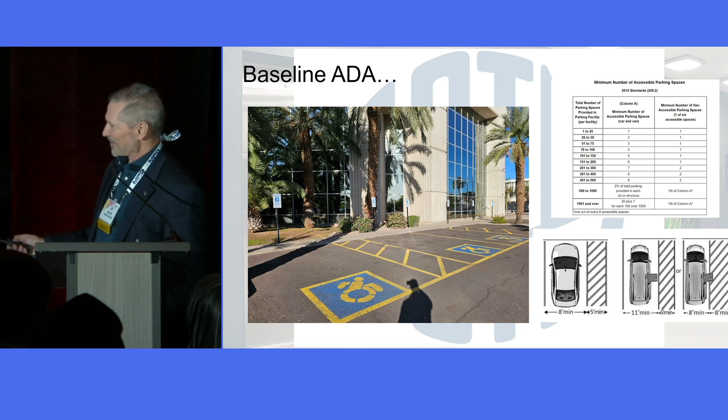Like I said, the sign's got to be 60 inches to the bottom, okay? Look at that—does that look like 60 inches? This one here, a little less. While I'm thinking of that, don't use your tape measure in your pictures. I do it so I have stuff for presentation, okay?

When you start doing that, you're getting into that territory where you're doing a full ADA, and it's an entirely different animal—very, very granular, okay? So don't do that. I even have a little pitch gauge thing that I put on ramps to see how steep they are, but don't put those things in the pictures. So when you see that, it's just me. But anyway, you look at those, and those are just a little bit short, right?

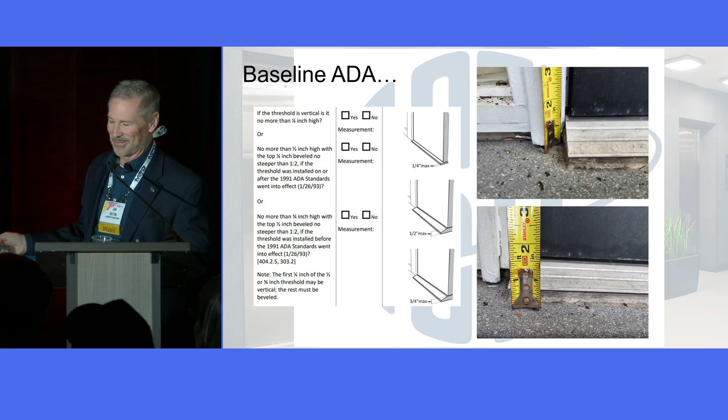Of course, you have to think. If you're in a chair and you're trying to navigate through something and there's an obstruction, like a threshold, well, there's very specific heights. Okay? Again, don't use your tape measure. But this one was really funny because this was an attorney's office. And that's their front door, right? Oh, this is good. This is good.

Another very, very common one. If it's got a service counter, it can't be more than 36 inches. And that's very, very common. No one's going to do anything about it. I don't care, but it's one of those things that should be in your report. This is another very, very common one. There's very specific requirements for that sign, the location and all that kind of stuff.

Hardware, though, is a big one. Okay, now, like if I find this sign and it's on the door, is it right? No. Is it substantially right? Yeah. So pick and choose your battles. But the hardware you can't compromise. You have to be able to operate it with like a closed fist is basically the rule. No grab and twist type of things.

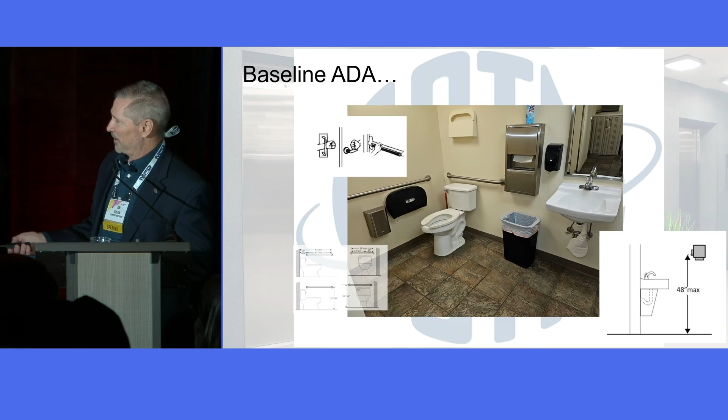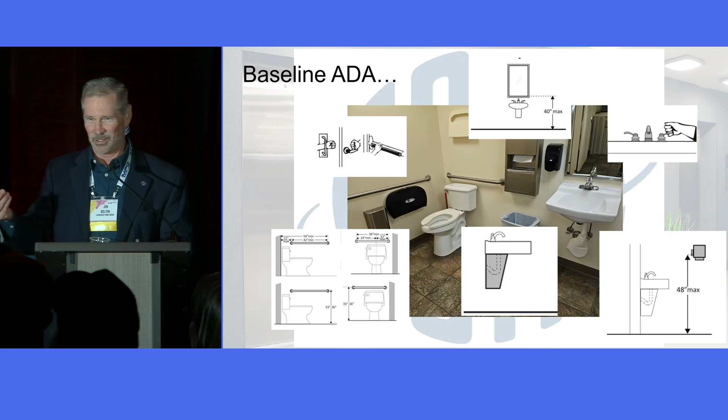The bathrooms have a ton of different things, but again, they're not hard. There's requirements again for the hardware. The grab bars have got to be one behind, one beside. There's certain locations, they have to be certain heights. The plumbing all has to be protected, right? That's why you see that all the time, because it has to be. Again, the hardware on the faucet, the height of the towel dispensers, 48. These things will start sticking in your head when you start doing them. But there's a lot of different things. And get that book I showed you. It's a free download for ADA stuff.

All right, is that cool stuff? It's not hard, right? Hopefully you're sitting here, you're feeling emboldened, right? Make me feel good. Shake your head.

All right. Elevators. Don't have a ton of them, and they're not hard. You don't have to pawn these off on another contractor every time you run across them, because you're just doing baseline stuff. The very first thing you're going to need to do is get familiar with the types of elevators. The good thing is these are what you're probably going to find 99% of the time, hydraulic and traction. And these can be grossly expensive to modernize. I'm getting excited. I'll get to modernization here in a second. Never mind. Familiarize yourself with what kind they are.

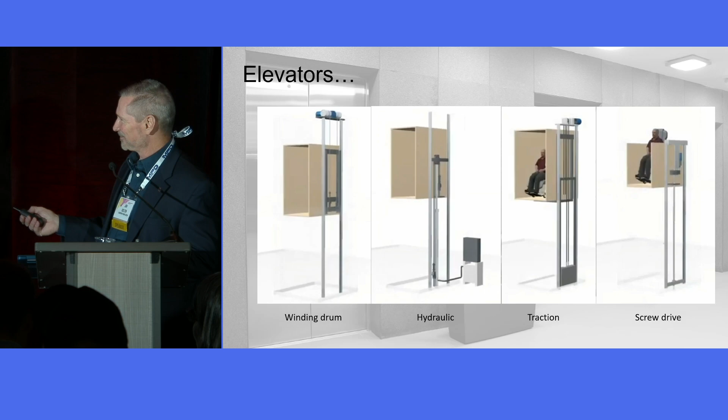The interior components, what kind of shape are those in? Especially flooring. We'll show you in a second. If you get lucky enough where you can see the machinery, like you can get above a car or below a car in a pit or something like that, you're looking for basic stuff. Does something look worn out? That's it, baseline. You're not going to measure the depth of the cog on the gears. It's not that difficult. So we get a visual, then a functional.

You're going to ride it. That's pretty tough, right? Congratulations, you're all qualified. You're going to do that, but you're going to start to notice where the controls are. Okay. Another big one is leveling. The car has to be on the same level as the hoistway, the floor that you step out on. Right? Otherwise, it's what? It's a trip hazard, and it makes it hard for a chair to get in and out, right? So you'll start noticing those.

And when you start seeing those, well, now all of a sudden, it's a defect that you're going to call out, and if there's enough of them, you call for modernizations. The auto-open feature, when you do this, and the door opens, because you have to have those, that's why. And anything unusual is not right, okay? If it jerks, if it's making noise, those are all signs that there's something wrong. And guess what? We don't even have to know. All you got to do is say, hey, your stuff sucks. The job is really that easy.

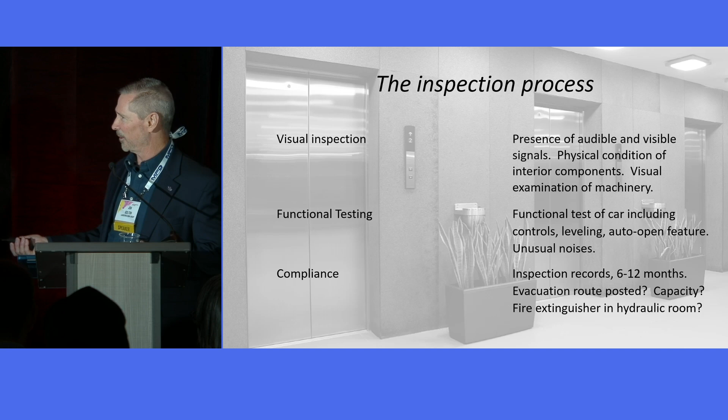Then the compliance things. You're going to be looking for inspection records. You're looking for the certificate, the capacity. 2,500 pounds, 3,500 pounds, whatever it is. Well, it's all written right there for you. They actually carve it into the elevator for you. It's really simple. Things like a fire extinguisher in a hydraulic room. You'll be looking for those. They come in a lot of different sizes.

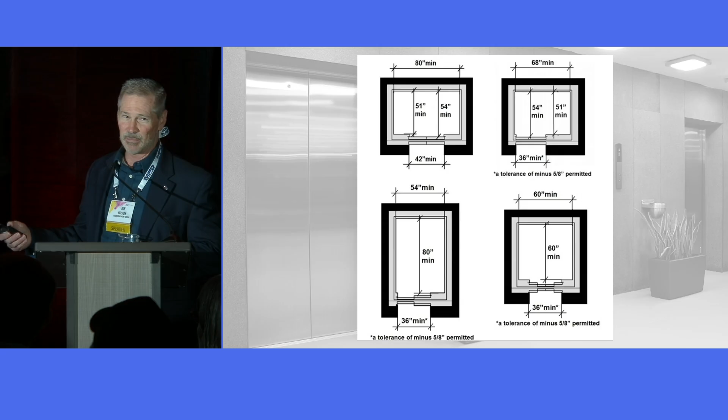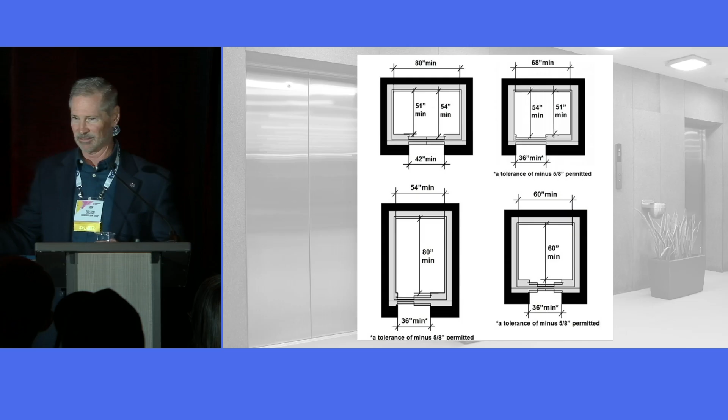Okay, you don't have to memorize any of this stuff, but if you see there's one thing common in all of those, 36 inches access. You didn't have to memorize another number because we already know that you have to have 36 inches of access everywhere. All the way through, from the parking spot to the front door to the bathroom to the doctor's office that they got to go into. Everything, right? 36 inches wide. So that's easy.

When there's an alteration to one car, every other car that goes to that level has to have the same alteration. Ooh, they got like 7 of them here. That gets expensive real fast. Really, really, really fast. But it's all about a consistent level of accessibility. Okay, so you can't have one that's modern and works and the other one that jerks and isn't level and all kinds of stuff. You have to do all of them at the same time.

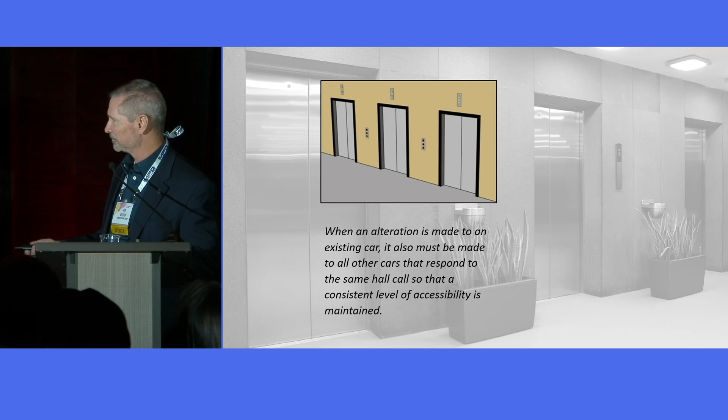Now, of course, standards apply to things that already exist. We're inspecting buildings that are already there, right? And there is a whole compliance scope for that, and I will show you where that comes from here in a second. But what's that? Correct. Good question. So he says, hey, there's passenger cars and there's freight cars. Freight cars, well, you ruined my surprise. It's coming up. Freight cars are not part of the accessibility stuff.

Those are exempted, okay? Can you imagine going to a construction site? You know, they have the elevators for the workers and try to make that wheelchair accessible? So there's certain things that are not included, and freight cars are specifically meant to be just for staff and freight and that kind of stuff. Those do not contribute to the accessibility thing. But the standard is ASME A17.1.

Good luck finding free information online. There's very, very little. This is another standard that you have to purchase, okay, that you have to buy. Good thing is there's enough information out there that you can get by. But that's where all the rules come from, okay? And of course, it's full of ADA stuff. Not just the modernization and leveling, all that kind of stuff. There's a whole bunch of ADA.

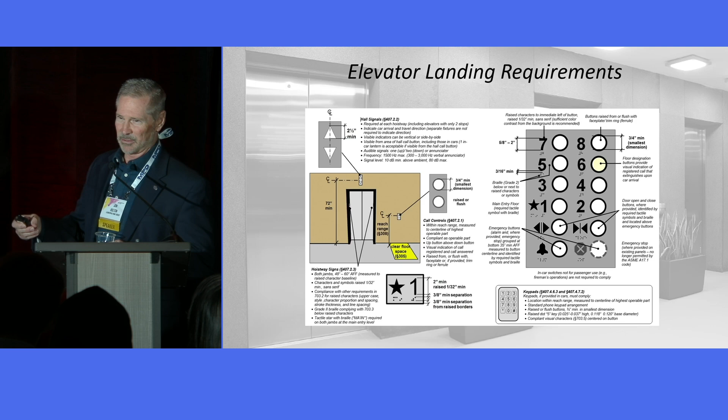Okay, just recognize that you're supposed to have these things. And when you look through that ADA book I was showing you, that free thing, it explains all of those things.

You're always one step ahead of me. Keep ruining my surprises up here.

You want to see something interesting? Every single elevator always has a star next to the one. No, that's what everybody thinks. It's actually because Dallas Cowboys are the #1 team in the country. Hey, what? Look at that. Boy, that was right in the gut, right? You're welcome, damn it. That's the star rating. There you go. Yeah.

Man, this is actually a really good question. There is so much information. If you go to Google and you start entering in elevator accidents, there's a ton of them. I'm not a doomsday prepper or anything like that, and I've never been into the gore type of stuff, but there's some stories.

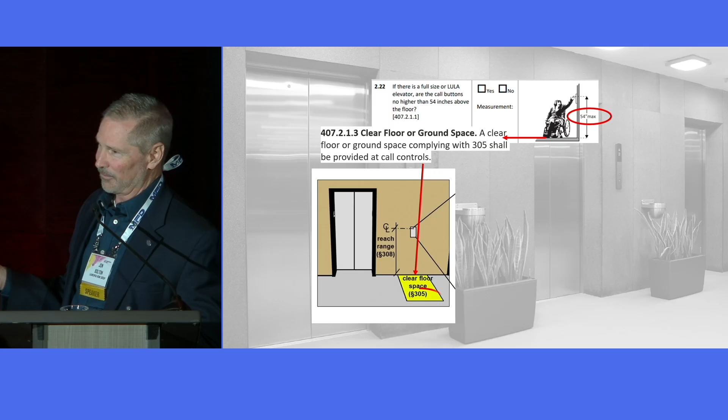But again, everything has a height requirement, because if somebody's in a chair, you can't put something that only Hank can reach, right? You know, love a short guy. So there's height requirements there, but you also have to have a clear space in front of those controls, okay? What is the definition of a clear space? Well, it's right there, 48 by 30.

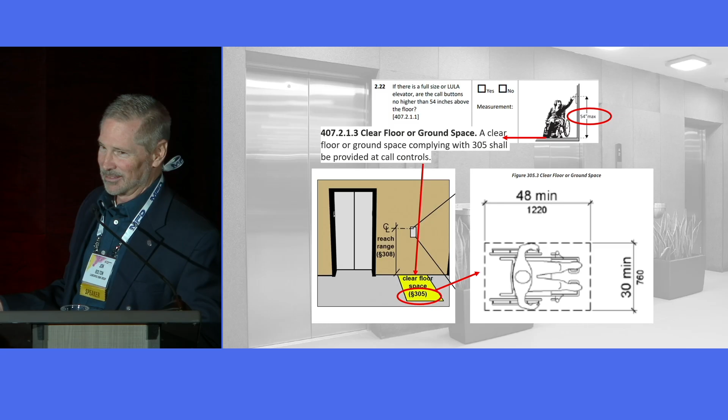Why? Well, because people put plants, cigarette butt trash cans and whatever else in front of the controls, and if you can't get to it, if you don't have the clear space requirement, 48 by 30, then that's a defect. Now, sometimes it's as easy as moving a trash can, no big deal, right? Yeah, it is kind of common. You find stuff, because I get it, it makes sense. They always put trash cans there so you don't take the trash on the elevator, right?

Okay, visible and audible signs. You should have all those signals. Again, it's very rare not to have all that stuff.

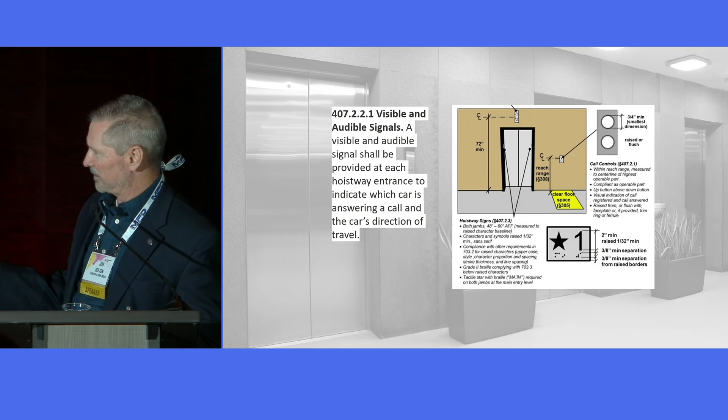You will display the Cowboys are number one on the first floor of every elevator.

Here's another one out of that book that you can get for free. Okay, there's actually a lot of them in there. It's in a survey style presentation. So you can go, is there a sign, right? You can just go right down the list and check them off. Maybe make your form look just like this. Hey, it's not a bad idea. So it's really, really easy.

Hey, you've done this your whole life, right? Now there's, because it's in the Big Book of Rules, it says thou shalt have auto open, okay? There are some critical areas which they define as 5-inch and 29-inch, but honestly, they're more of a curtain style detector where it runs from very low to very high, right? So when you get guys like Hank, it'll still pick it up.

And you know how you jump on the elevator and you're frantically pushing that close door, and it won't go? Well, there's a reason, because it has to stay open for so long. It's all in the Big Book of Rules. So punching that thing like a madman or madwoman ain't going to do you any good.

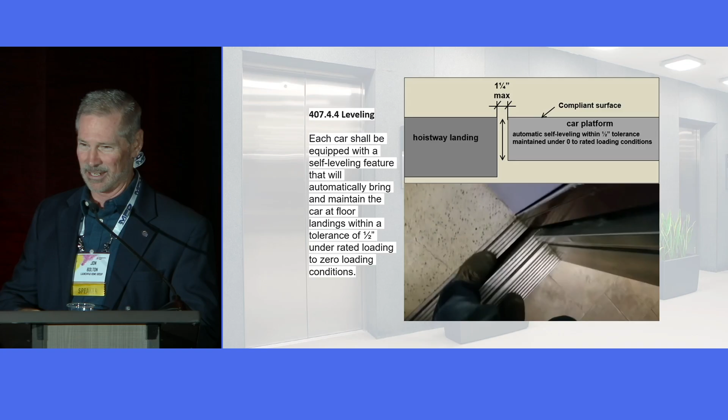Sometimes, that one, the hotel I did in Sarasota, my God, it was several inches, big time. Good thing is I had a list of very good reasons on why I'm recommending modernization, and I will get to that in a sec, because you're going to be blown away. This one, I show up, and this is what is there. It says, hey, caution, dummy. You might trip and fall. Thank you. See how easy this is? Sometimes they leave you notes. Yeah, darn right, liability. That was super easy. I got pictures of that coming up too. Yeah, it's all about money.

If you have carpet in there, a lot of times it's tile, but if you have carpet, it's got to be glued and screwed. It can't be loose or there's a trip hazard or anything like that. It's got to be firm, stable, non-slip, all those kind of things. But this is just common sense, right? You've been going up and down stairs for decades. And when the riser heights are excessive, you feel it. Same thing with elevators. You're going to get on and go, something's weird. You're onto something. Follow your hunch, right?

Same thing with the pile height of the carpet, okay? You have limits on that because you don't want, dear God, we want to bring back shag of the 70s, right? Something like that might not be compliant.

If you've got tile, again, you're going to have a point where it's too high. Think like you're in a wheelchair, okay? But there's pictures. Remember, there's pictures in this book, so you don't even have to memorize anything. You just have to own it, and it's free, so nobody has an excuse.

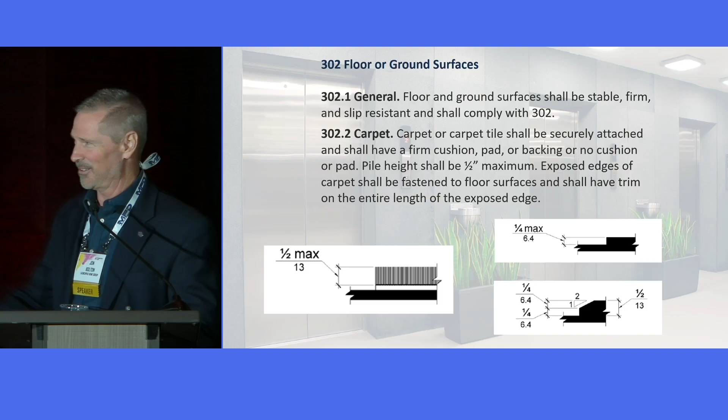If you can get in a mechanical room, absolutely request it and absolutely go in it, all right? They have to be well lit. There's got to be a fire extinguisher. There's usually a book in there, and you can flip open the book, and you can see that Joe signed off on this date. He had to replace this component, right? I'd take a picture. He replaced a major component, or if they're not too long, you kind of read through them all, and if you're seeing something that's consistently breaking, that would be a red flag. So you take a few minutes and read the records there.

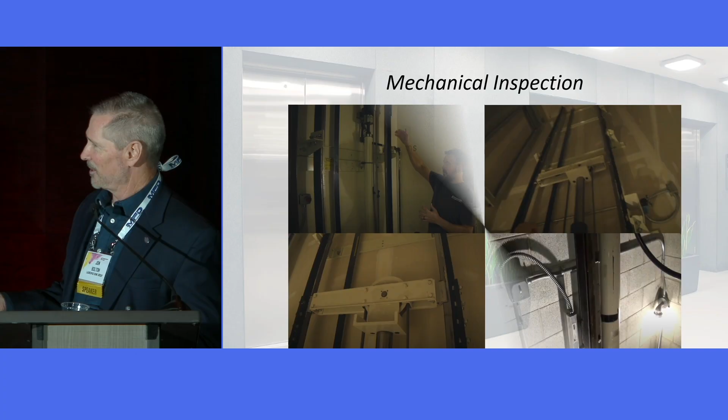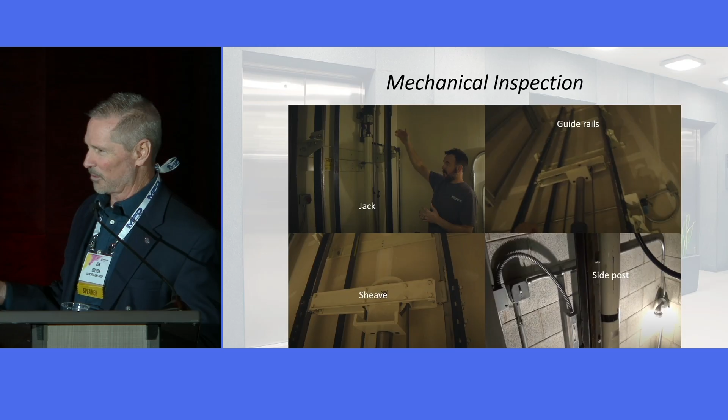Of course, if you find a hydraulic stain on the ground, that'd be a good one to document. If you're doing phase ones, right, Hank? That's something you got to look for. Hydraulic leaks. And anything visual, right? So if you get inside, you don't have to memorize the name of it, it's a sheave, it's a side post. It's just so you recognize and take pictures and look for the obvious things. We're not mechanics, okay?

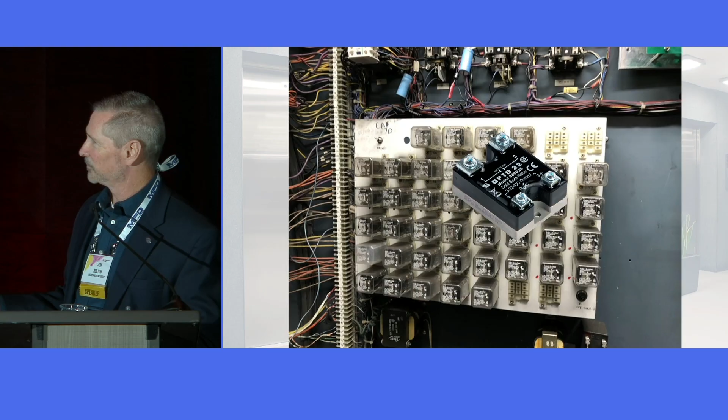This I've seen multiple times, and it's over your head. That's looking straight up, and it's a controller for the door. Helps the door open and close, and I just look for anything obvious. Put that in there. When you get in a control room and you start seeing capacitors, you know this sucker's old, all right? This is 80s vintage. Okay,

back when the last time the Cowboys won, yes, exactly.

This is just real simple. It's old technology, and this is probably time for a modernization. This is that same place where it had the sign on the door that said, "Hey, I'm broke. Thank you." And I look inside there and, matter of fact, there's a picture of it. I mean, yeah, this is just so old, it needs a modernization. It just makes the decisions easier, right? You can't require anything of anybody, right? But your report is going to reflect. They can't force you to replace if you can fix.

Yeah. So this is a hydraulic pump. There's a pump in there, and it pushes hydraulic fluid in there and makes the post go up and down. Makes the car go up and down, right? Real simple. So, well, there's a sign of a previous leak. Picture, canned statement, done. Piece of cake.

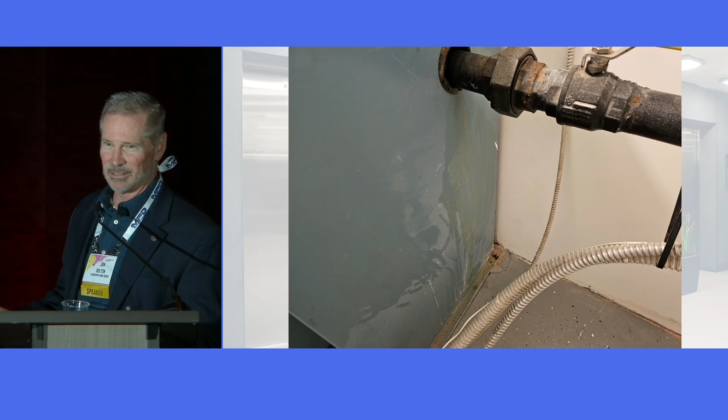Okay, modernization. I keep talking about that. This is the process of modernizing. Wow, who'd have thunk with a name like that? But it's not just the mechanical stuff, it's efficiency things, which is not just new light bulbs, okay? It may be a more modern, efficient, less energy consuming motor. Okay, there's a whole bunch of stuff that they can do. The time frame is 25 years where they recommend modernizations.

And I'm not gonna lie about this, but I'm gonna blow you away how much this stuff costs. There's always variables. If we've got 41 stories like that tower over there, that's gonna be a lot more expensive than a 5-story. Obviously, you get that stuff, right? But as an average, a hydraulic modernization could be $110,000 to $130,000 per car. If you have a traction style, that could be $220,000 to $250,000 per car. You see out here, they got 7 of them? Whoa. Okay, that gets expensive really, really fast. I'm not lying, those are real numbers. So that's a big thing. But all you got to do is check marks, right? We got a list. We got pictures.

All right, I want to hit some fire sprinkler stuff because, again, nobody goes to home inspector school and learns how to do elevators and ADA and fire stuff, right? And we'll hit some sprinkler head things. Why is this so important? Besides the obvious, fire safety. Any firefighters, by the way? There's always a firefighter.

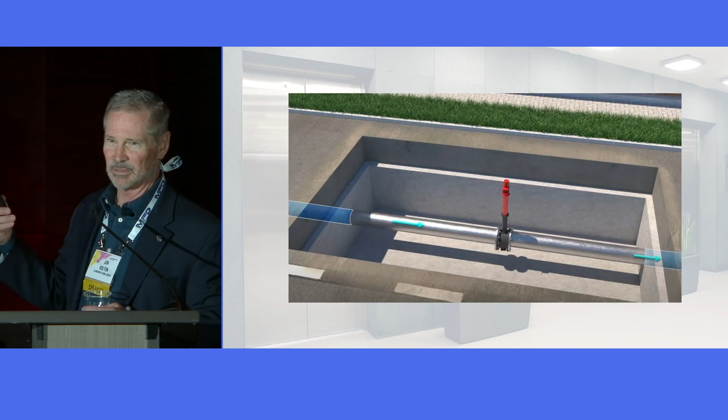Gotcha. So this is what it looks like. Once this is in your head, it'll stay there, right? It just goes down to the water line and then turns water on or off. So if you have to service something, you can shut it down, service the thing, and then open it back up. That's all it is.

The risers can be inside or outside. You'll find both. You're not going to operate anything on these, you don't touch them, right? But we can all take pictures. That's simple, 5th grade level here. Easy peasy.

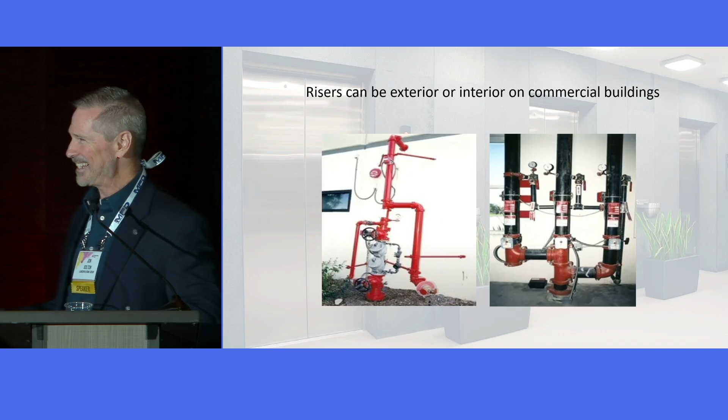You want to get the certification stuff, you want to get pictures of these things. Now, of these pictures, 2 of them are illegible.

Whoops, darn it, sorry, I don't know how to go backwards. Thank you, appreciate it. Thank you, Lord. God's got my back, baby.

A wet pipe system means the entire thing is full of water all the time, okay? So the riser comes up and the branches go out to the rooms and spaces that it's protecting. The water is always in there. That's a wet pipe system.

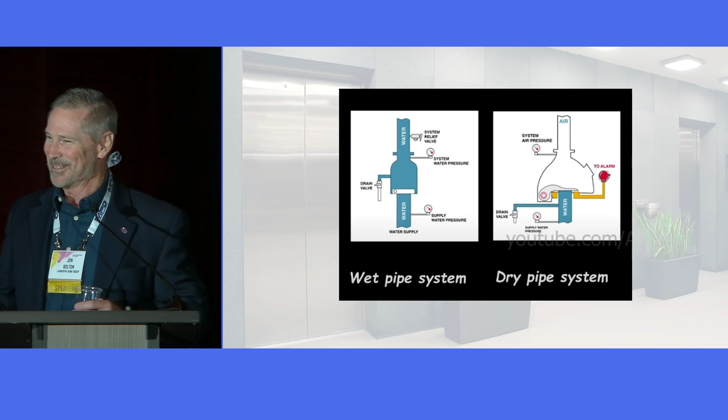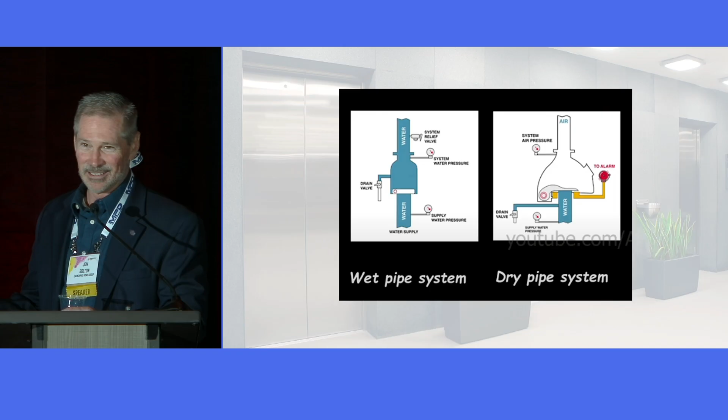And you wonder, okay, all you guys north of I-10, don't answer, but why in the world would you want a dry pipe system then? Freezing, yeah, there you go. You're obviously from north of I-10. If it's subject to freezing, that would be a bad thing. So hence, the dry pipe system has its uses. But now you know.

Probably. Makes sense.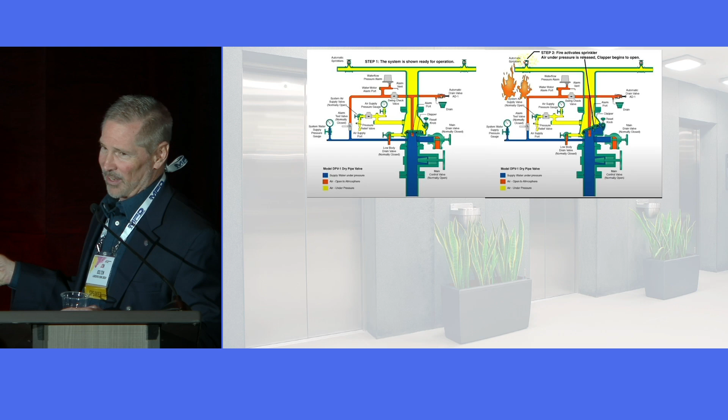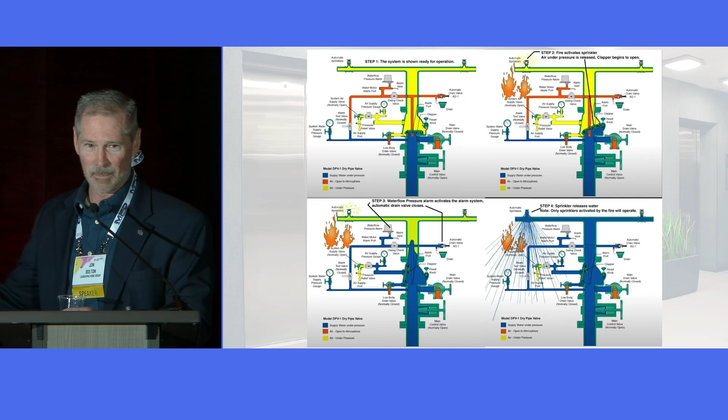This, they call it a clapper valve or something similar to that. So there's water up to it, right? And a fire breaks out, it activates the head. Now all of a sudden you're losing pressure in these pipes, and then another valve is going to open up the clapper valve and start letting water out, fills the system, and water is dispersed. So that is a very basic explanation of how a dry pipe system works. Pretty simple.

So the big question is, how do you tell the difference, right? I'm glad you asked.

Well, when it's a wet pipe system, I don't have that big valve right here, right? It's just one pipe because the whole thing is full of water. When I have this big, huge valve, this is the wet part and this is the dry part. I'm also going to have gauges on the dry part and the wet part, so it would be a good idea to get a picture of these gauges. If you can read, you're in luck, because a lot of them just say it. This is dry pipe.

Dang, and in our system, when I review, sometimes I find it's wrong. So it's a good thing that we had a reviewer, right? If you're a solo operator, you're going to have to slow down, okay? And look, this one right here says wet system, that's cool, you can read it right on there.

All right, there'll be a differential pressure because there's air holding back the water, right? And it's usually about a 3-to-1 ratio. I've heard they go up to 5-to-1, but say that one's 40-ish and the bottom's 120-ish something, so that's about a 3-to-1, right? That's going to help me identify, well, this is definitely a dry pipe system. So not real hard to identify, right?

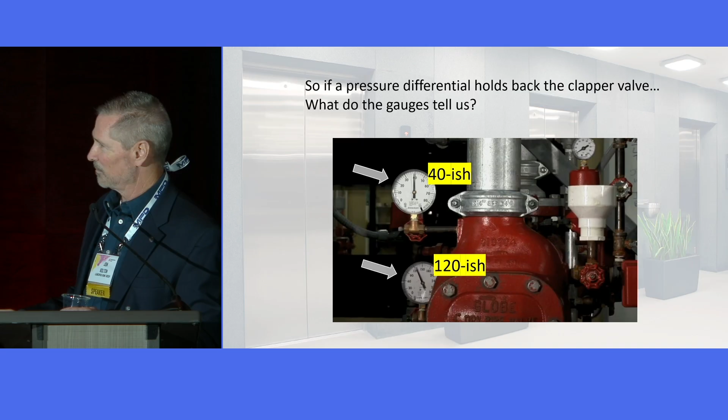This is a static system, the same exact thing that's bringing water to your house. The pipe comes up, and all of your pipes are full of water. You open up the kitchen sink, water comes out, right? Same exact thing, so it's a static pressure. So there won't be that differential pressure. See how simple? Love it.

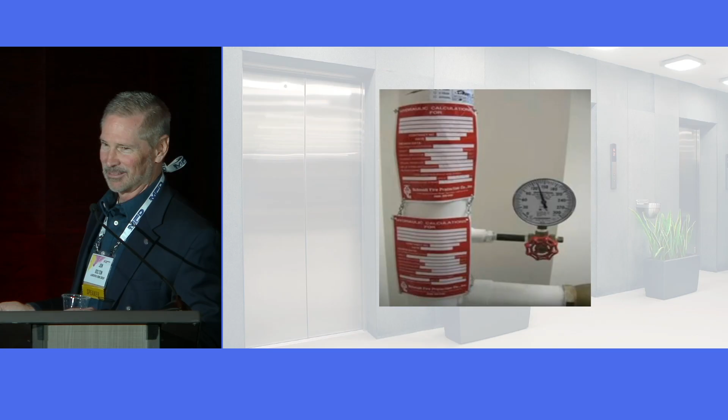So I got one gauge, wet pipe system, right? I haven't lost anybody, have I? I don't think I can see anybody. But okay, if something said 0, that would be a big red flag, right?

And you're the fire guy? Okay, don't laugh out loud, but feel free to correct me if I'm going wrong, if I'm saying anything wrong. Am I all right so far? So far, all right, cool.

Well, there's your FDC, Fire Department Connection, right? And those couple guys are going to jump off the truck and hook up, and now you have more water, higher pressure, more efficient system, right? So it's just a big pipe serving a bunch of little pipes, just like a house. If you break it down and think about it like that, 5th grade level, it really makes it simple.

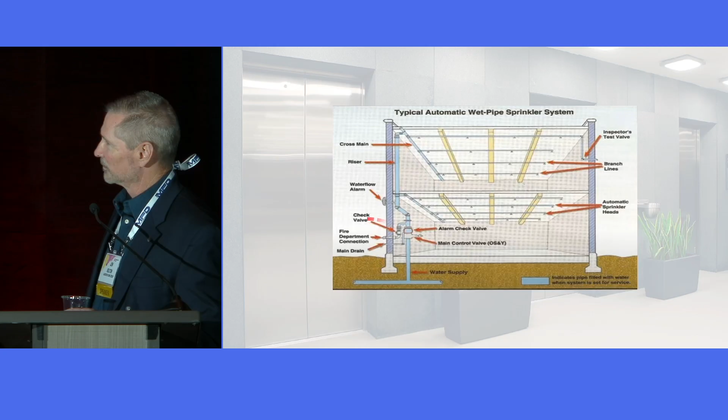Yep, FDC. Okay, bam. That was my whole point in that. So, simple picture.

There are other basic types, and I just want to mention this so you're aware. Like the example I gave before, if you're converting a daycare to a storage facility where you're storing foam, products, chemicals stacked all the way to the ceiling, these are going to be drastically different engineered systems. The biggest thing with specialized storage versus normal commercial space is how much water is moving through that little device, those sprinkler heads. You might see this imprinted on the heads, letting you know it's a very specific engineered type of head for that application. The deflector pattern may be different, making the water droplet bigger. There's real engineering that goes into this, but we don't have to know any of that, just so you're aware.

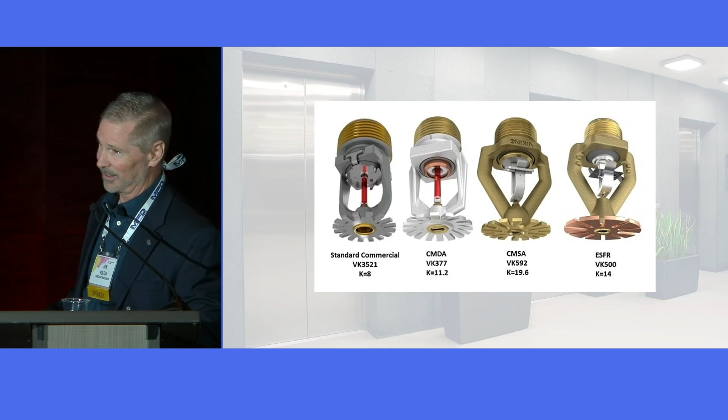Makes sense, all right? Like I said, the biggest thing, fancy words here, is the K factor. That's how much water - bigger hole, more water. Bigger orifice, bigger K factor. Those are some of the biggest things: how much water they're delivering, how fast it's deploying the water, for very specific applications. And that's all I got, because they look the same. It's not like you look up and say, oh, that sprinkler head is something special.

They look the same, so you don't know by looks. If you have heads that are subject to damage, you'll probably see some type of cage, something that protects it.

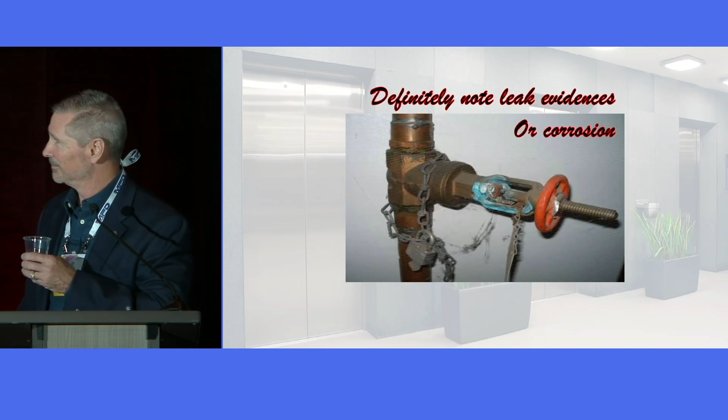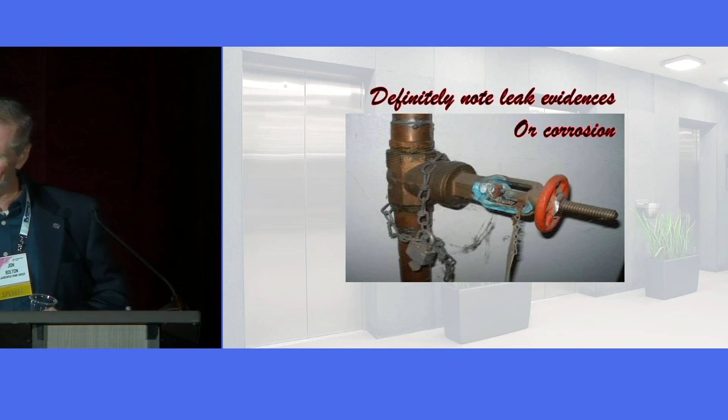All right, so pictures - that's always the best. Inspector porn, right? What do you see? Well, I gave you the answer, if you can't read I'll help. Something's leaked, that would be a bad thing. That's an easy identification picture in your report. That wasn't hard. Here you are criticizing a fire system - we aren't even firemen. We need a badge or something.

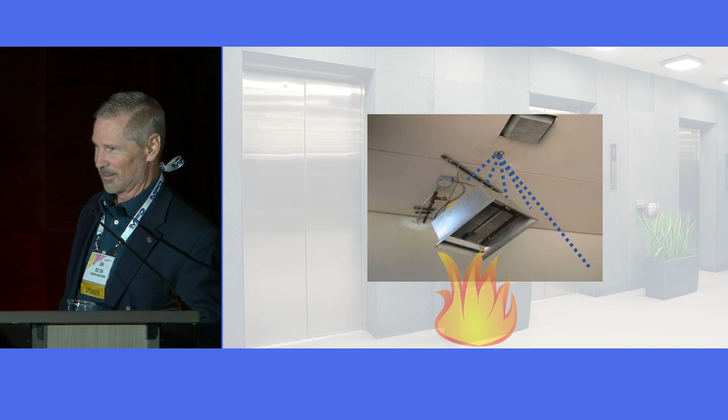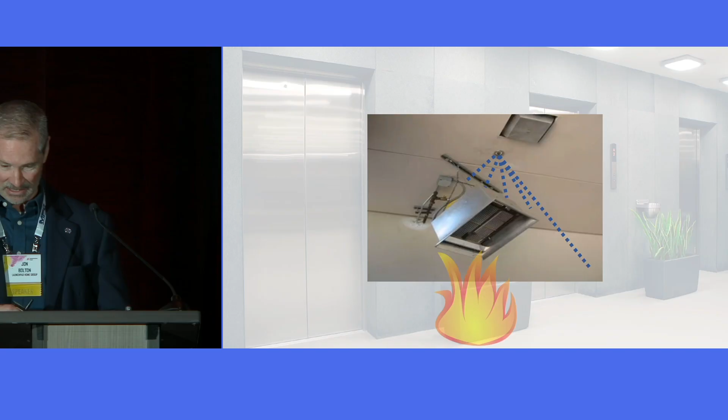So this is how you think - I always use the macro-micro approach. I walk into the room and stand there first, just get the overall picture. And I see something like that. That was easy: picture, defect, recommend repair. Simple, right?

Because you see this all the time. Yes, that's a very simple fix, I get it. But now you recognize the problem. So if a fire broke out down here somewhere, that may not be any good, or it's going to take a lot longer for the water to get down there to the fire.

There is, and I would not attempt to cite that on every single application because it may vary. Now, the only thing I know is consistent is it's got to be 4 inches off the wall, minimum, can't be closer than that. But I'm sure there's a lot more - no more than 6 feet. Okay, yeah, all that stuff will be engineered, laid out.

Well, that's a good point - what happens in commercial buildings? The interiors are modified all the time. And now all of a sudden you walk into an office and this poor sap's only got one receptacle. He's got 2 returns, no supplies, and 1 receptacle. You see that kind of stuff all the time. So yeah, very, very good point there.

Uh-oh, that's the end of my presentation. If the obstacle is permanent, well, you just go around it. Not that hard, okay?

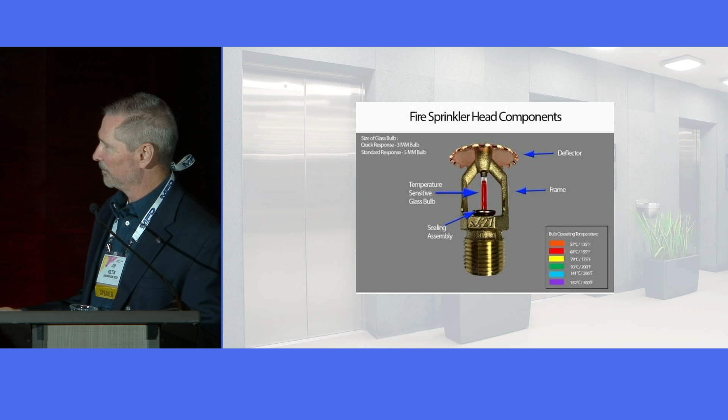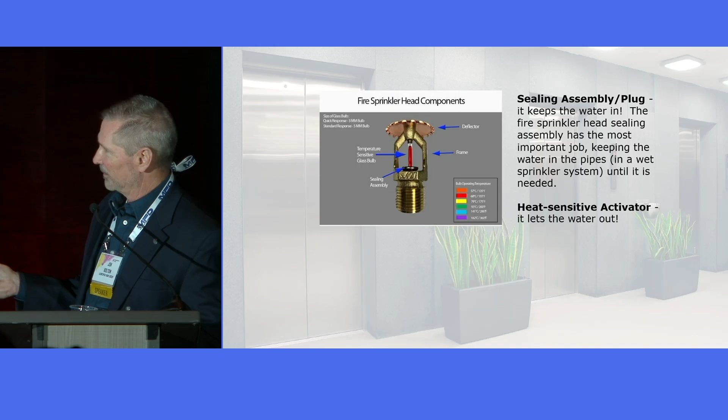So the primary components that we have here, the seal is what keeps the water in, right? The activator, heat-sensitive activator there is what lets the water out. The deflector will be designed for whatever application it's designed for, how to disperse the water, how wide, how big the droplets are, all that kind of stuff. And we don't have to know any of that, just so you have the concept, right?

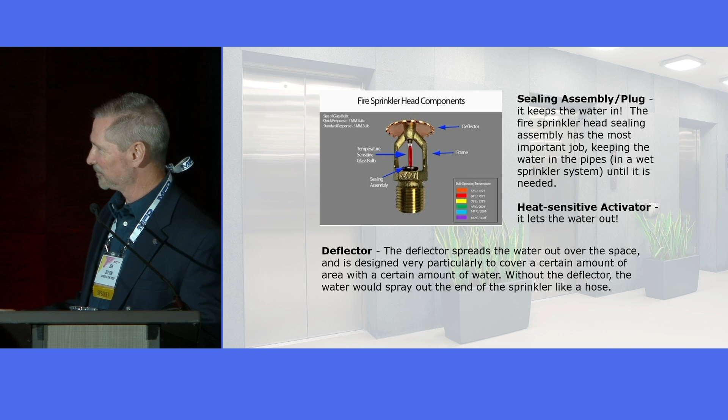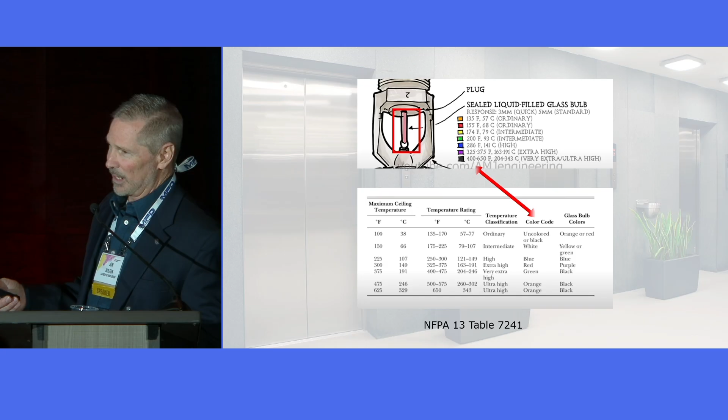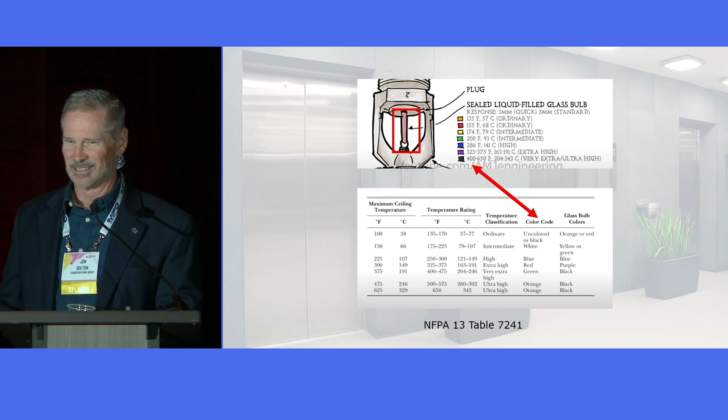Almost all the ones you see are red, but occasionally you'll come in and you'll see different colors, and they break at different temperatures for different applications. But again, that's all engineered stuff. I would probably look for consistency, though, right? I got a black one here and a red one next to it, and then a blue one. Well, something's not right. Follow your hunch. And the good thing is you don't have too many handymen working on fire sprinkler systems. Those just screw them up.

But now you know. Now, if it does have that little bulb that breaks, they're usually full of a glycerin that's very, very sensitive to temperature, so that's how they can control it. But there's also linkage type sprinkler heads. Okay, not that there's anything wrong with them. They're just different. And the same thing, they're heat sensitive and they break at different things.

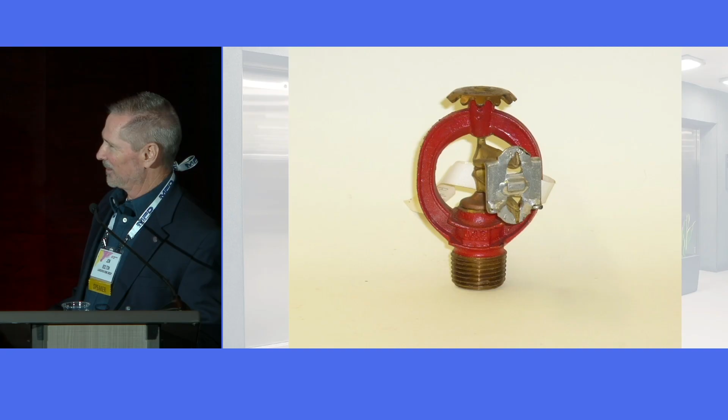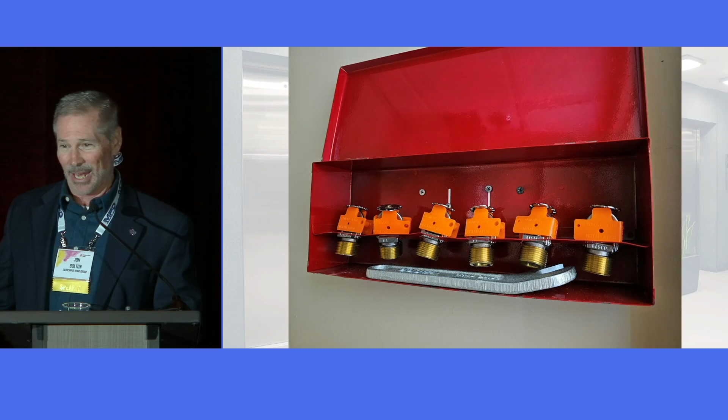There's all kinds of different looking ones, so don't be alarmed, pun intended, when you see a linkage type thing. Okay, extra heads, you have to have them. It's in the big book of rules. Okay, it says thou shalt have extra heads. That's what it says right there, right? Now, this is the easiest place to identify the manufacturer, and that's very, very important to identify the manufacturer. I'll show you why in a second. But here, I can just pick it up, put it in my hand, and take a picture.

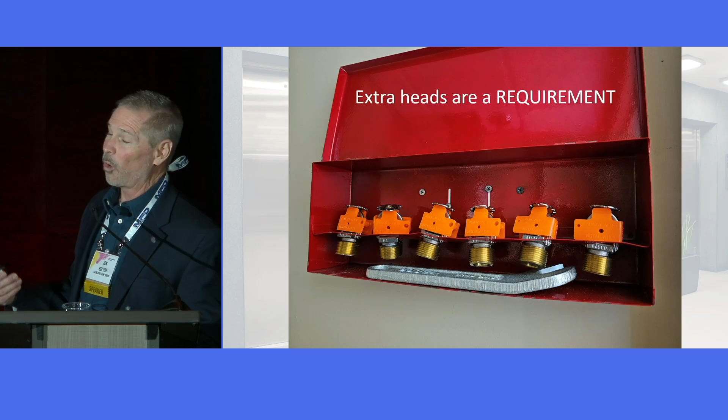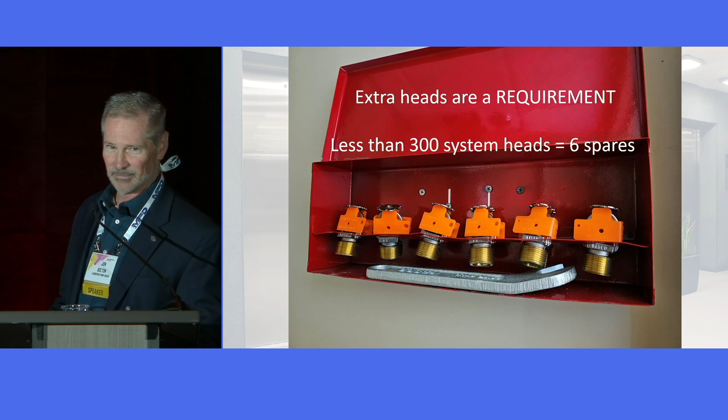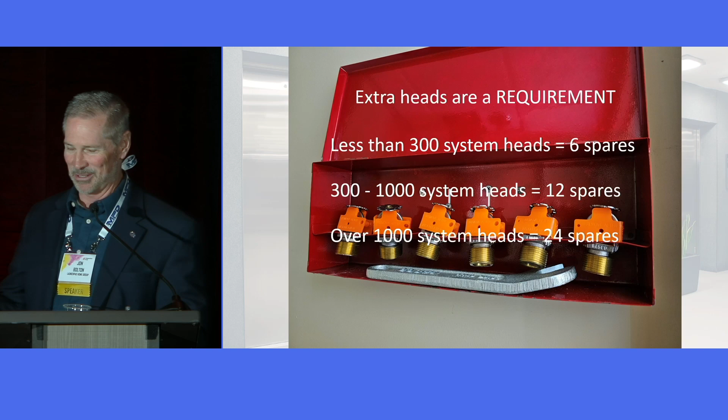These extra heads are a requirement, and the quantity of heads depends on the size of the existing system. If you have less than 300, which is going to be most of our jobs, okay, then you got to have half a dozen of them. If you have 300 to 1,000, you got to have 12. If you have over that, then you got to have 24. You don't have to memorize this stuff, write it down somewhere, and you always can refer to it. The good thing, the vast majority of the spaces that we do are going to have half a dozen of them. They also have to have that little wrench in there. So that's just a component.

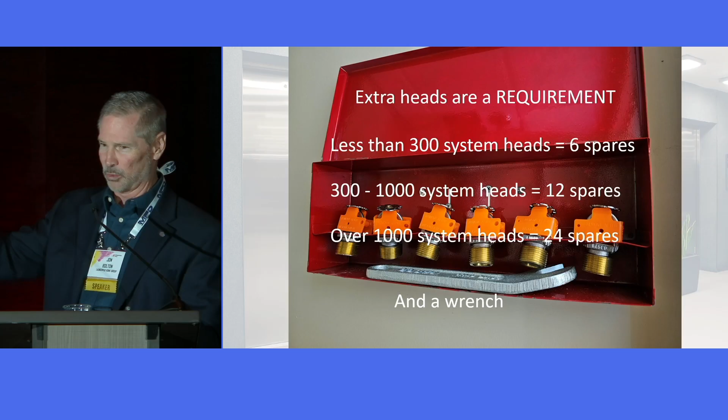This is a simple picture. I'm going to get a couple pictures out of this, right? Now I'll have a contextual macro shot of the whole riser room. I'm going to start outside. I got a picture of the room that's labeled fire riser room, right? And then I have the contextual picture of the whole system. Then I can go into components and stuff like that. But this is real easy. I can pick it up and document.

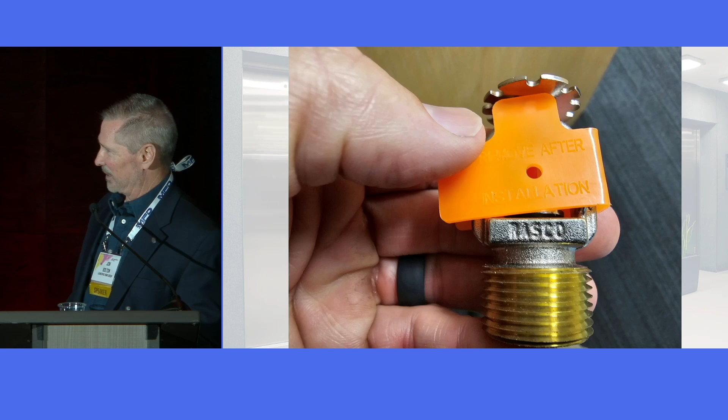It's a Rasco. Simple. If you don't have those, you can't find them, they're gone, missing, vandalized, whatever, you will have to get on a ladder and get a picture, not in here because these are concealed, but most of them will be exposed. You got to get that manufacturer.

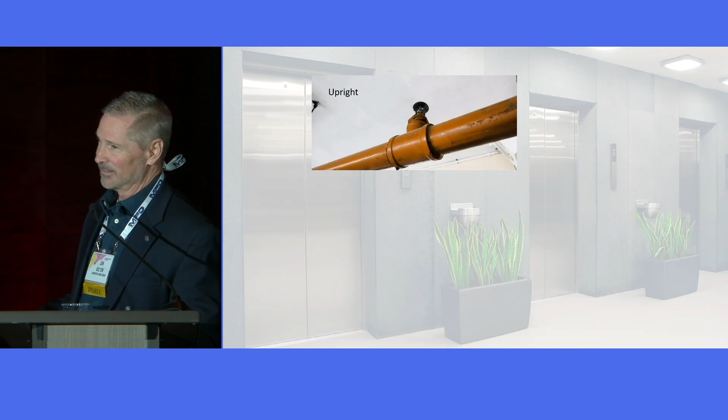Okay, 4 basic types of heads. You have an upright, very, very common. You have pendant, same exact thing, but that points down. Concealed like we have here, right? And then sidewalls, and they have different applications. We don't have to figure any of that stuff out. Now you know the language, and you sound smart, and if Alex Trebek asks you, you'll win, okay?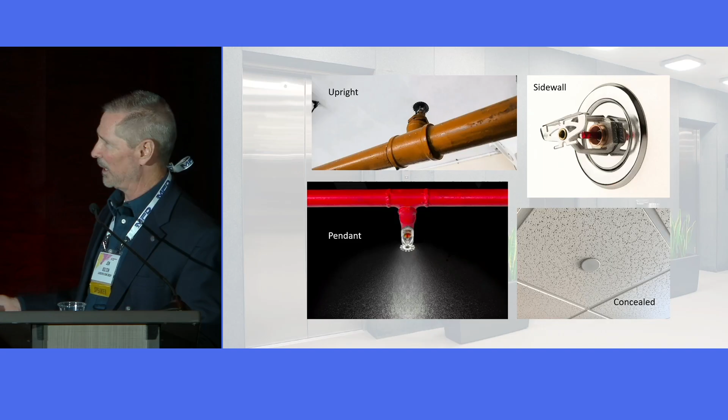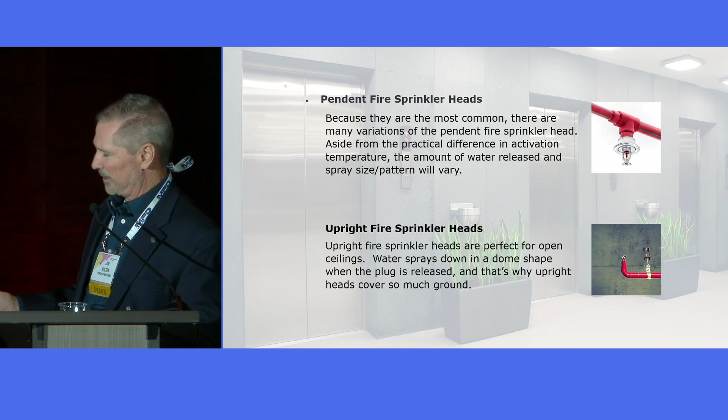These are by far the most common, right? They cover a lot of area. All this stuff, again, is engineered. Pendants, uprights, sidewalls when there's a soffit or something like that, and fancy concealed ones when you have a nice high-class place like this, and you don't want them to be seen.

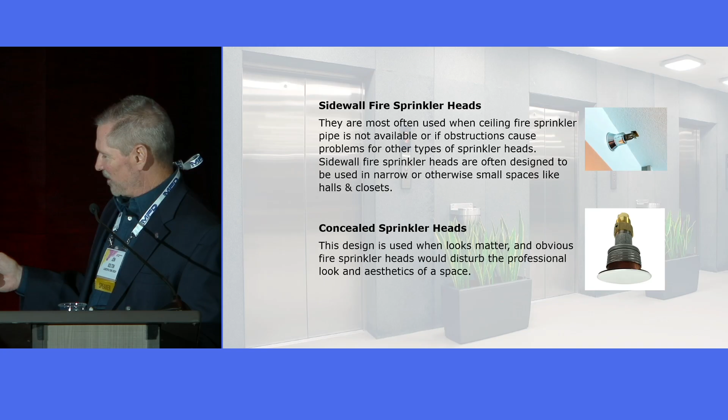One thing I would say about these, and hopefully it's the next picture, yes, okay, a manufacturer makes them and sends them to a testing place that tests them and makes sure everything functions properly, right? Well, they ship them with the little cap thing on them, because that's how they're tested. And the cap thing will release at a certain temperature, and then your head is exposed, and it's just like a pendant or an upright. Now it functions just the same, okay? But if you're seeing these missing, that's a defect. Simple.

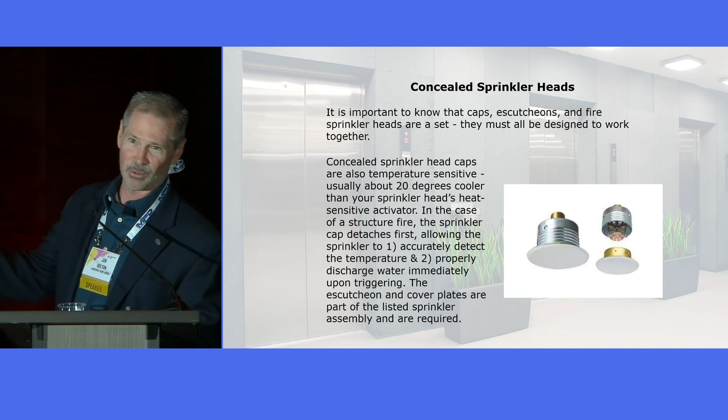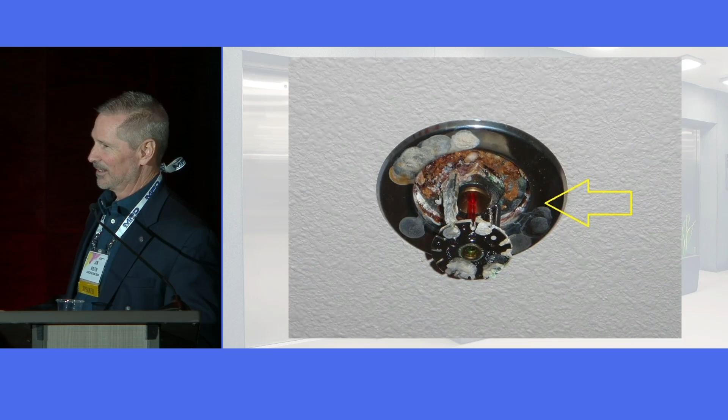It's old, but it looks pretty corroded, right? So corrosion noted, it's very old, maybe obsolete. Okay? Can't miss it. Yeah, big time. So pay attention. You're going to have to slow down and look at these heads, right? Evidence of leaks. Yeah, painted, bad. We talked about those being temperature sensitive. Now you alter that sensitivity. Now all of a sudden the thing takes forever to activate. Well, now the fire spreads bigger, farther. Bad things happen.

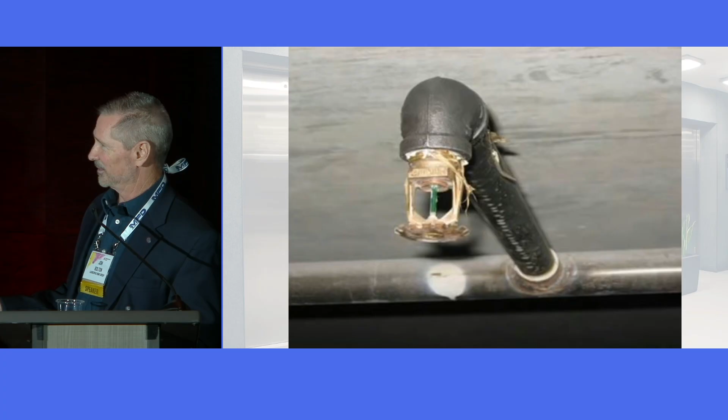There's this cobweb city or something there. They got extra heads. They're dangling on a coat hanger. But they got them. What do we say, Hank? Bless their heart. Bless their heart. Okay, kind of hard for the thing to disperse water with a cap on it, huh?

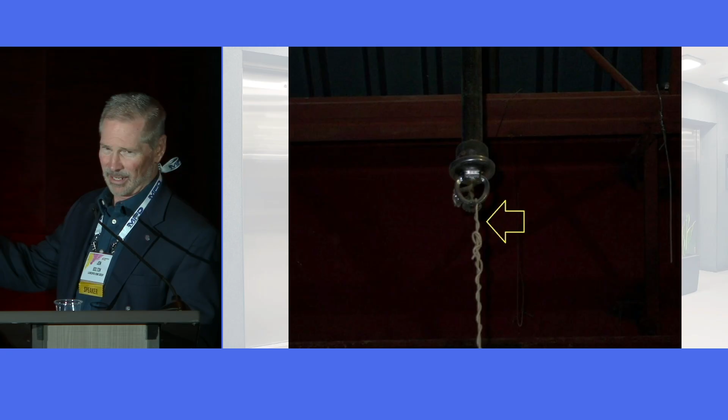This is Hank's room here. We were hanging out last night, and he had stuff hanging on it. So let me get a picture of that.

Okay, the reason why you have to get the manufacturer, there's been a ton of recalls. I know that comes as a shock to some of you, right? Tons of recalls on sprinkler heads. Here's a list of them coming up next. You don't have to memorize. You will naturally memorize them after a little while, but you always have something to refer back to. And it is in the Big Book of Rules. Remember, we looked at NFPA 25.

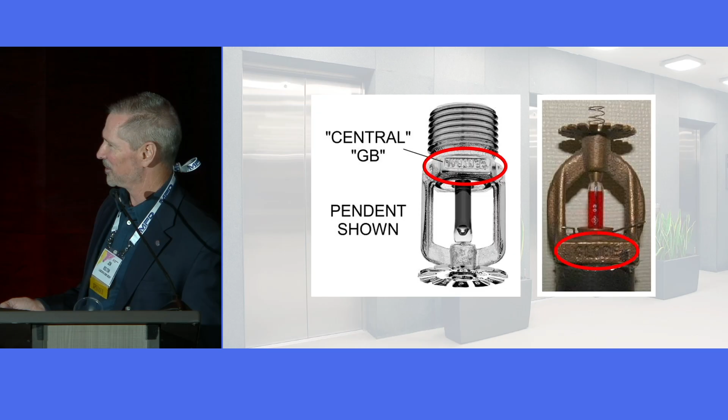Could be, yes. O-rings. Ouch. Okay, so there's Central, there's Globe. So this is easy peasy stuff. This is George Jetson Manufacturing Company right here. Some Omegas. Those are funny looking, right? Antique, vintage.

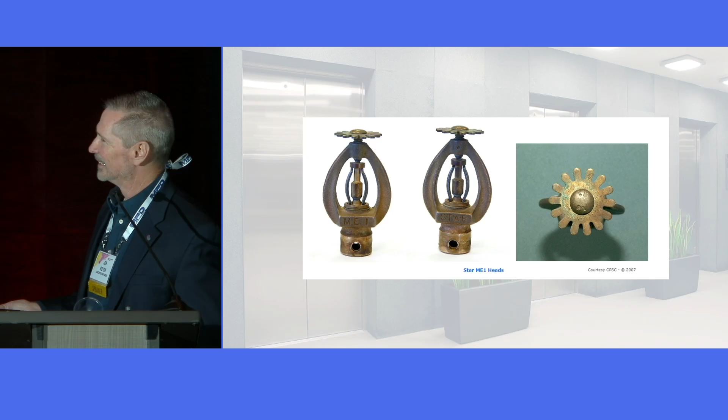Walking cadaver, right? All right, so I think I'm good on time, right? And I covered everything so well, there's probably no questions whatsoever. However, if you can think of anything, I'll be happy to try to discuss.